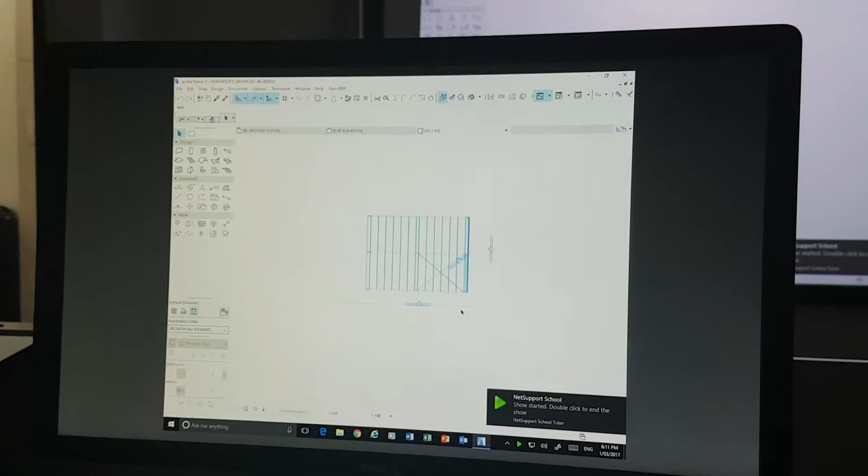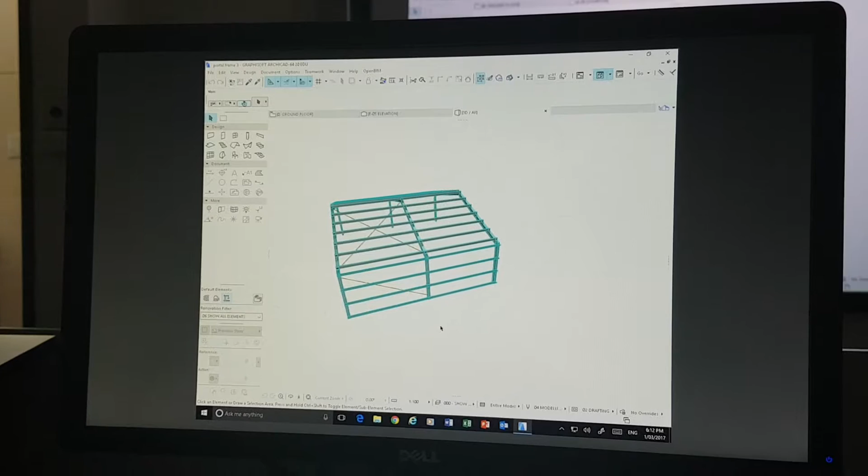What we want to achieve, this is like cooking with those cooking shows. This is the one we've cooked before, and it's really tasty, but on television you can't taste it, and you can't tell it's cold. Anyone who's been on one of those cooking shows will realise those judges have to eat cold food made 12 hours before, probably gone off. Under all those lights, I wouldn't do it. Anyway, that's just me being silly.

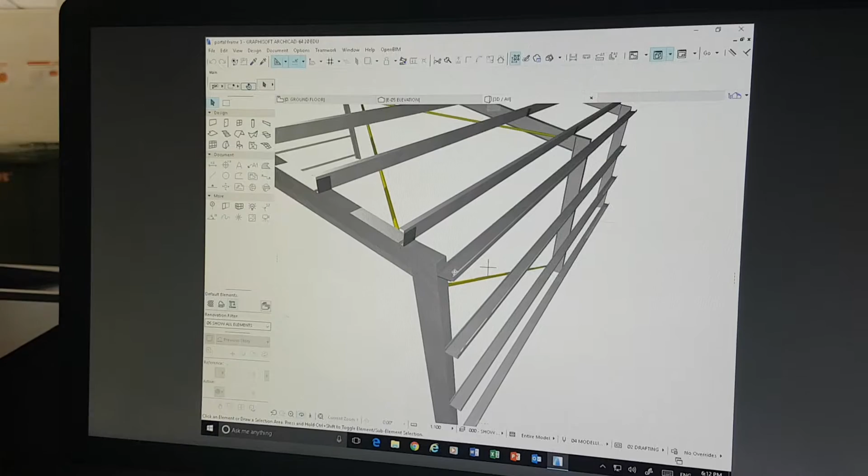What we want to achieve is the ability to put this diagonal bracing into the model. So far we've made the portal frame, using a standard portal frame out of the library. We've modified it by putting on the cleats, drilled holes in the cleats, used standard C purlins on top of that, and worked out how to rotate those. So we're learning quite well, learning a whole lot of different skills in Archicad.

The diagonals are probably the hardest thing to master, and luckily, after about 5 years, I finally worked it out. So last night I had my big moment. I worked it out. I know I'm wasting your video, I'm sorry, don't look at me like that.

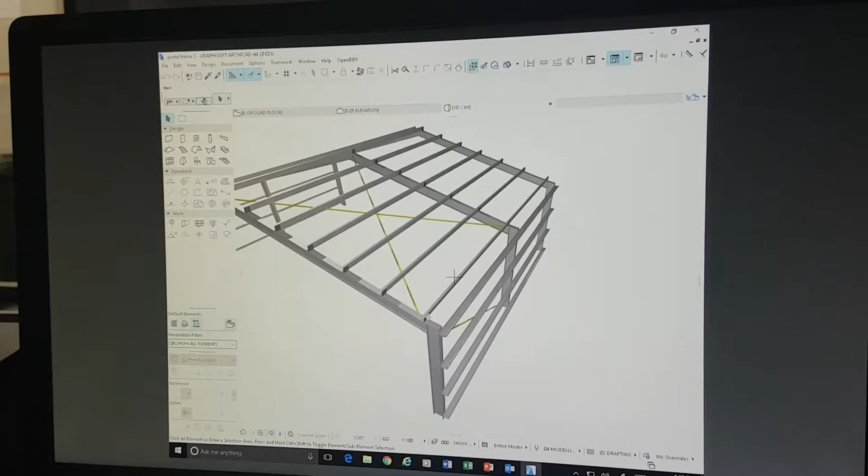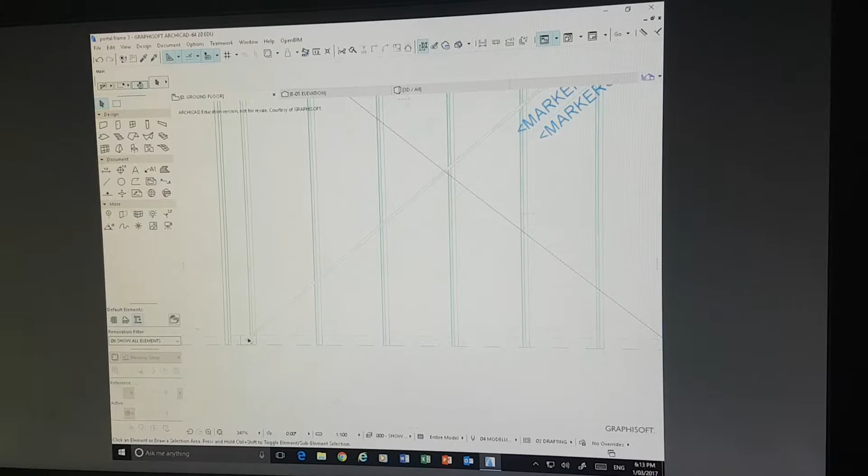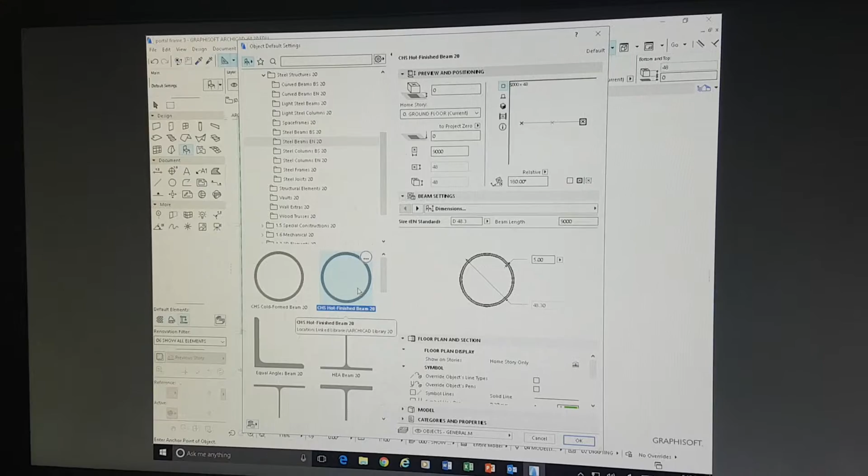So the way we start is, we've got our model built up. We go to the object tool, and I go to steel beams, and I've picked this round steel beam. The size is about 40 millimetres, and for the length I'm going to put in 9 metres to start with. It's wrong, but I'll put 9 metres because I need it more than 2 metres long. The other thing I can do is in placement, I can change the angle, which is going to be very useful for us.

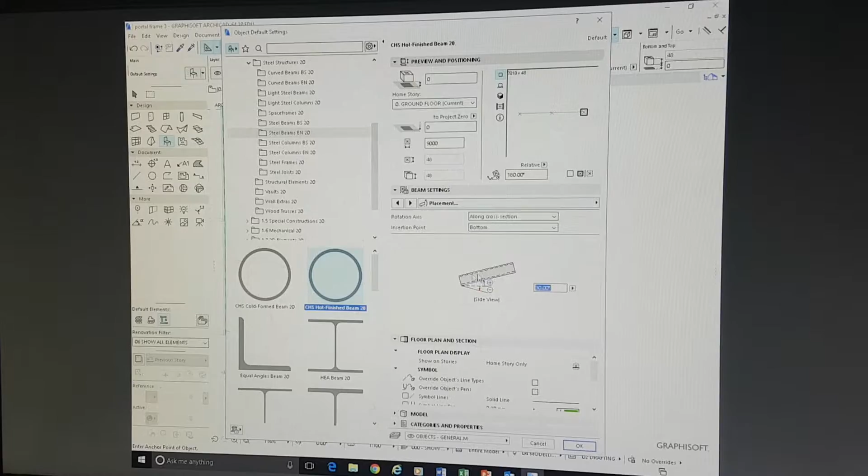I'm going to guess the angle is about 30 degrees. The last thing I do is up here, I rotate it around, and I put the insertion point down the bottom. So I'll place my diagonal tube there, and then I'll go into the elevation and see what I've got.

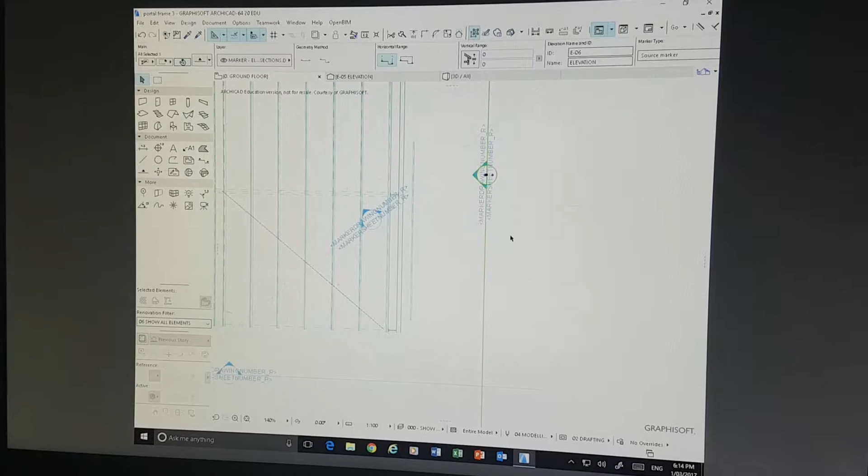So let's open this elevation, and there's the piece that I put in. You can see it's way too big, but it's pretty close to the angle that we want to achieve, which is a good start.

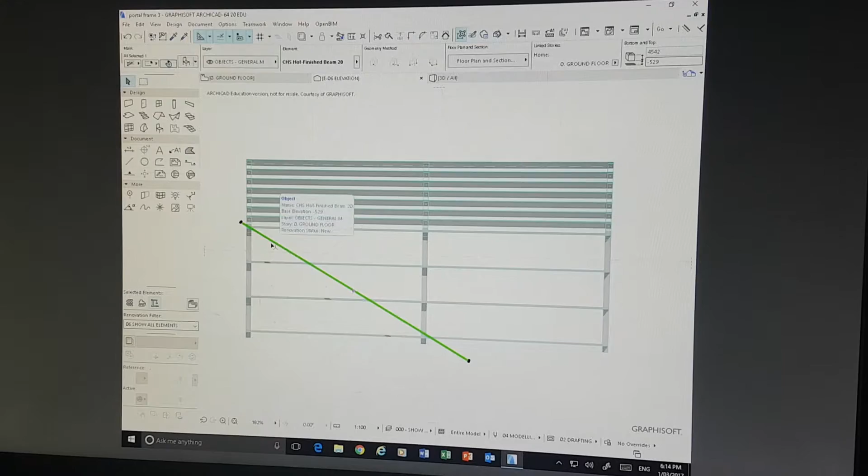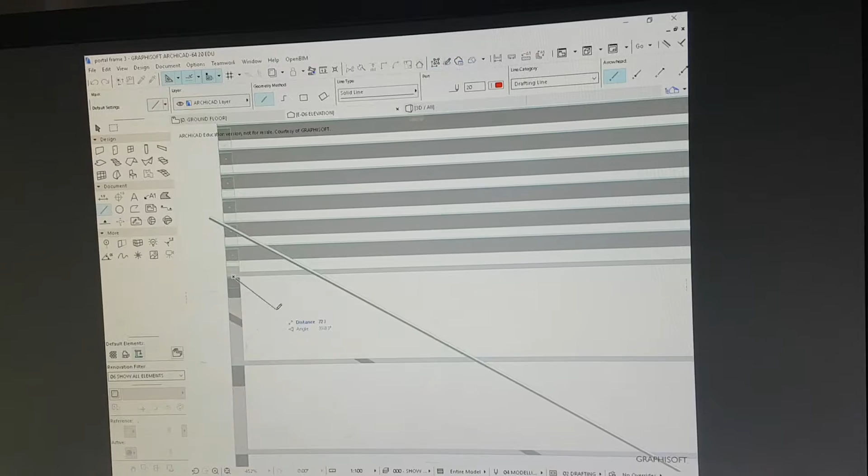The next thing I'm going to do is draw a line exactly where I want to place this beam. You don't have to do this, but I find it's good because you've got something to work to. So I'll draw a red line, working from about here down to about there. That's where I want this beam to end up, and now I'm going to measure the angle using this tool, from there to there, it tells me... come on, be good.

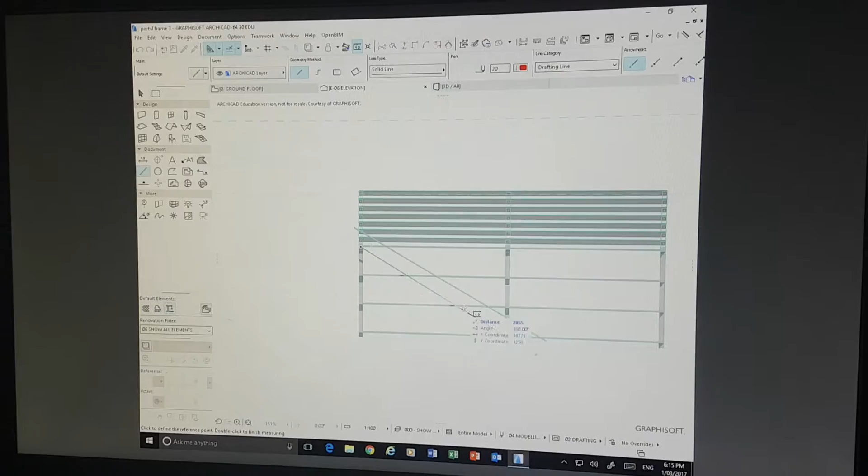It's 149.02. So what we've got to do is take 180 degrees minus 149.02, so it's roughly 31 degrees - plus or minus 0.02, so 30.98 degrees.

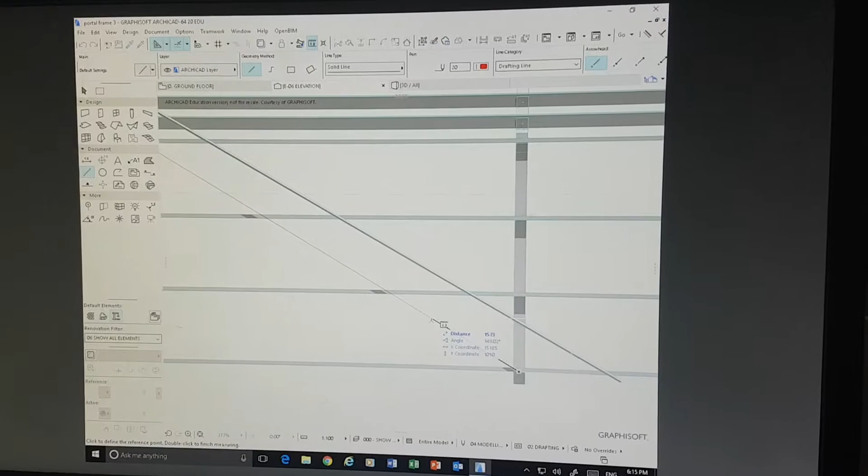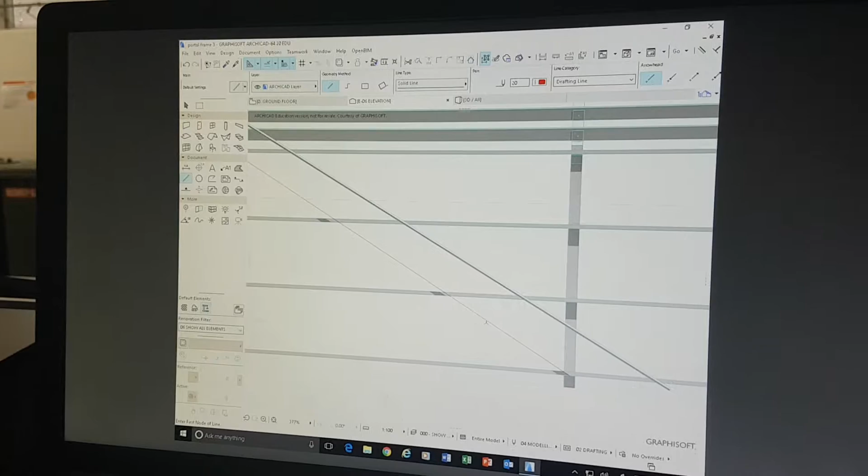But the other day we worked it at 28, wasn't it? 180 is 2 quadrants. Yeah, I understand, but you worked it at 28, not 31. It showed 149 at that angle. So it actually starts out there, 90 is there, and 149. Yeah, but what I'm saying is on Monday we worked it at 28.85. Yeah, that's because I've probably changed the position of these 2 points. Alright, okay. It doesn't really matter, it can be within that range.

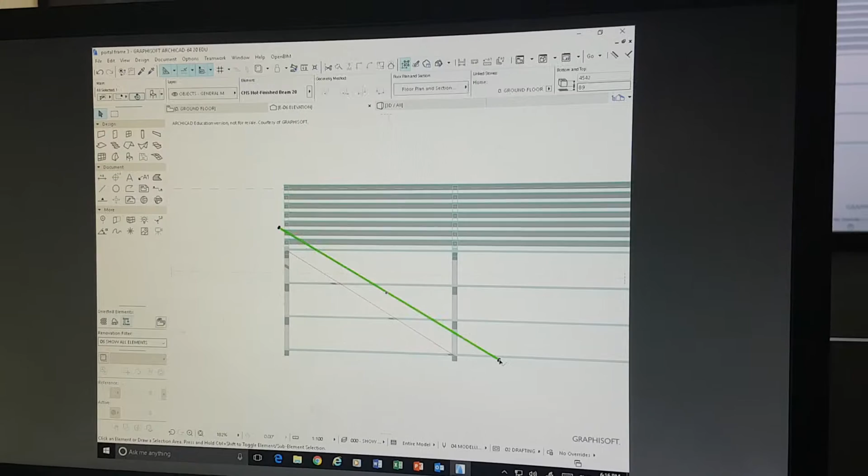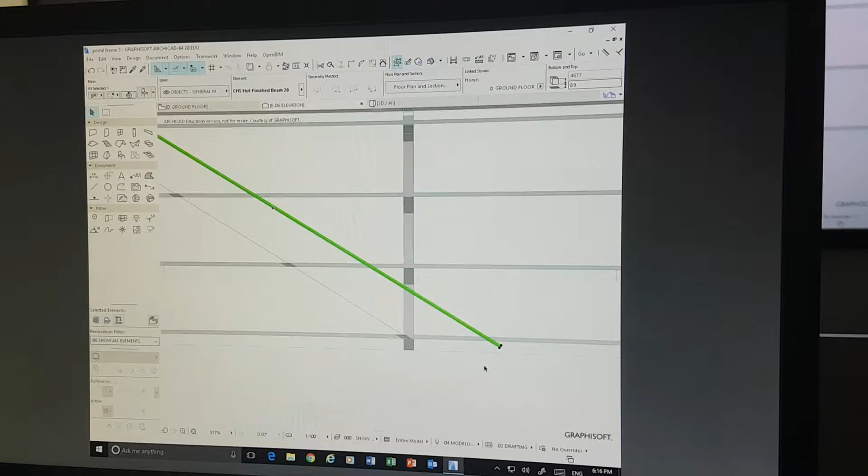So I'm going to make this 31 degrees, change that to 31. Let's crank that up. And then I'm just going to drag that beam across, using the drag function. Notice it follows the line perfectly.

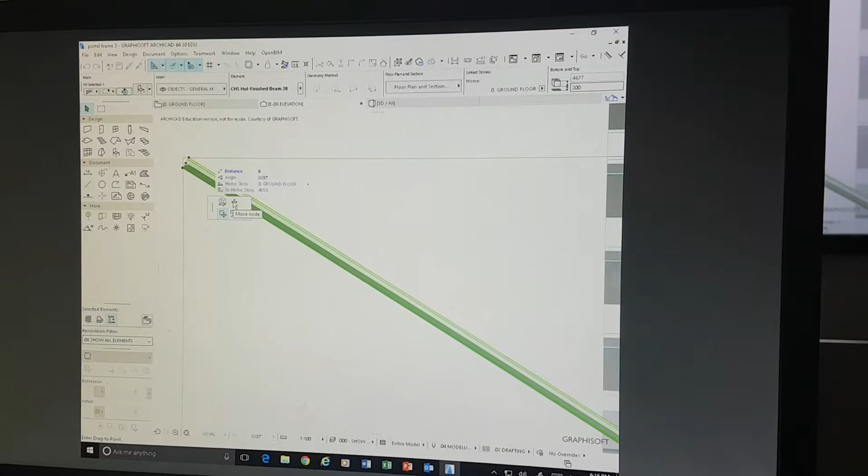The next thing I do is go to that pink dot in the middle, because that allows me this new button here, which is Move Node. So this is the way I change the length of it. I changed the length back to there. We're almost finished - this wasn't very hard at all.

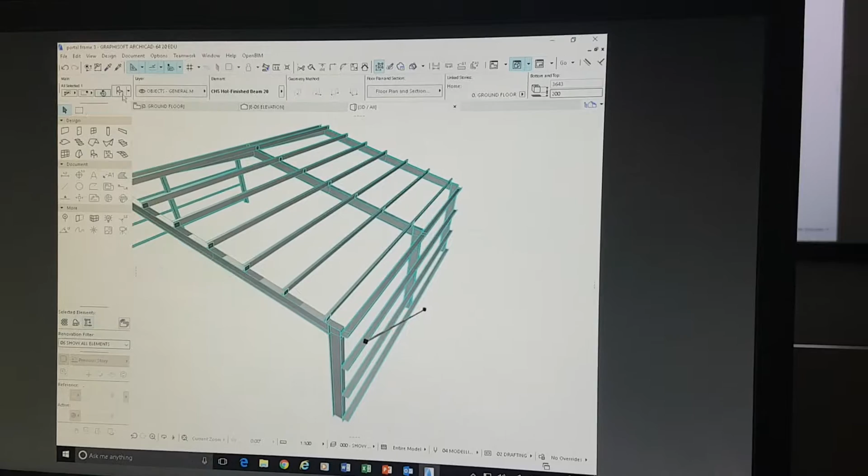What we've achieved is we've got a beam at the right angle. We go back to the plan view and we'll see it's outside of the building. We go to 3D view, you see where it's sitting, and that's all on purpose because we didn't want it colliding with anything else. The other thing I'm going to do is change the colour of it, because I like these to be yellow, not gold, yellow. Where's yellow? Pink, yellow. Right, so now it's in yellow.

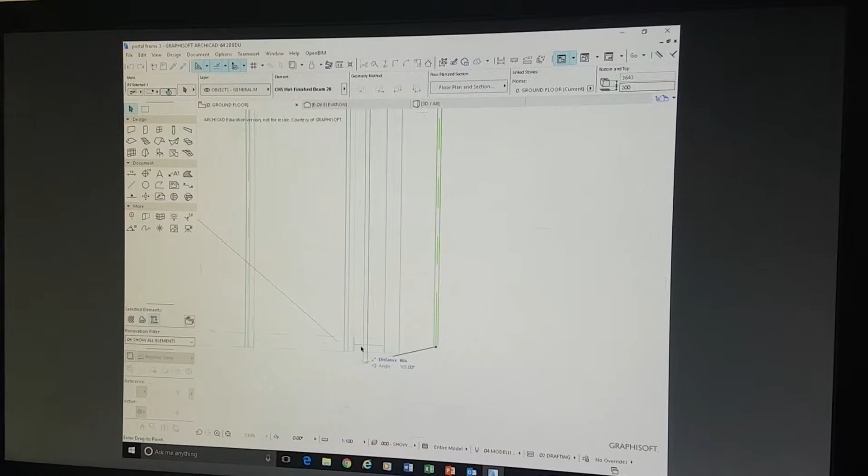Last thing we do is select it, drag it into our structure somewhere around, hold down the shift key, somewhere in the middle there, and then we test it in 3D, rotate around, and you can see at the bottom there it's come in at a nice place, and also it should be at the top.

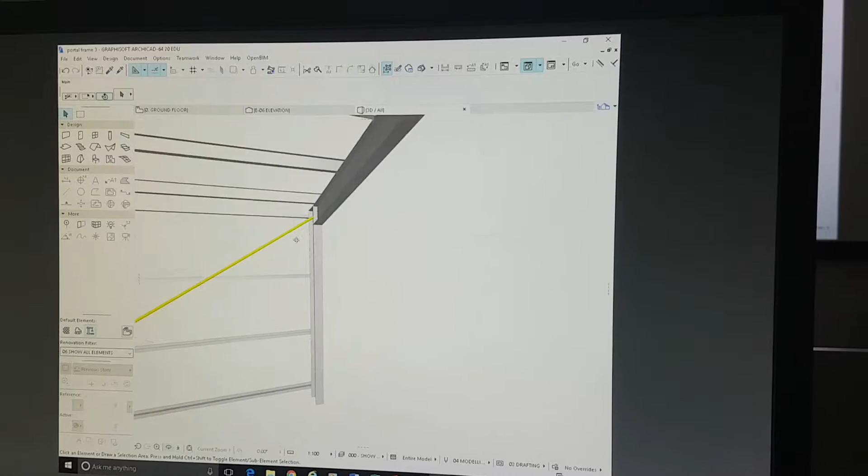There it is too. Okay, so there's a success with that. That worked. To do the top one, it's going to be a different story.

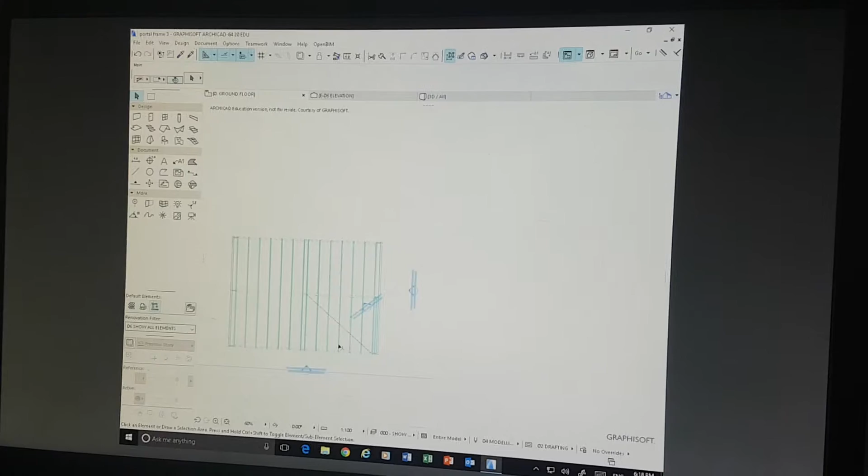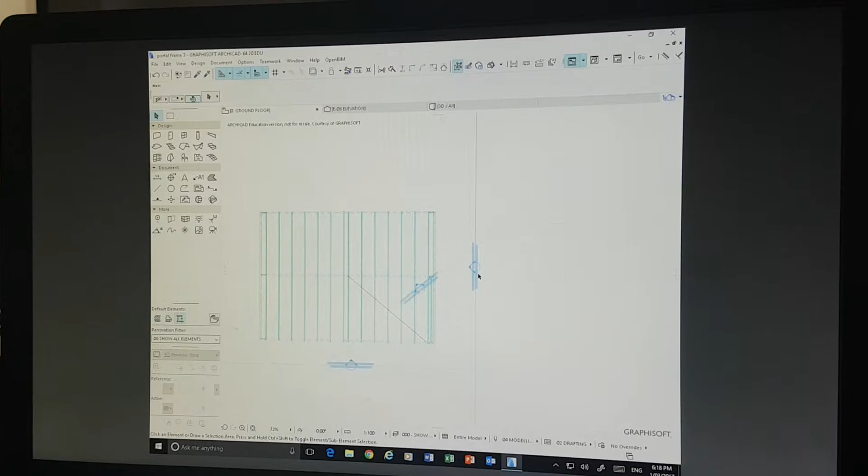One of the things we've been working with so far in placing this has been an elevational section exactly parallel to it, so that when we move it up or down, we change the angle, and it works exactly for us that way. Using that logic, I've got another elevation here, exactly at the angle I want the top bracing to be.

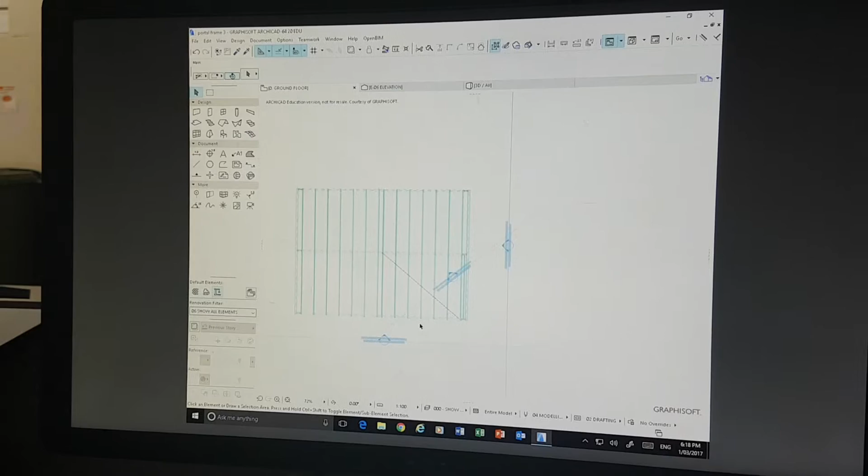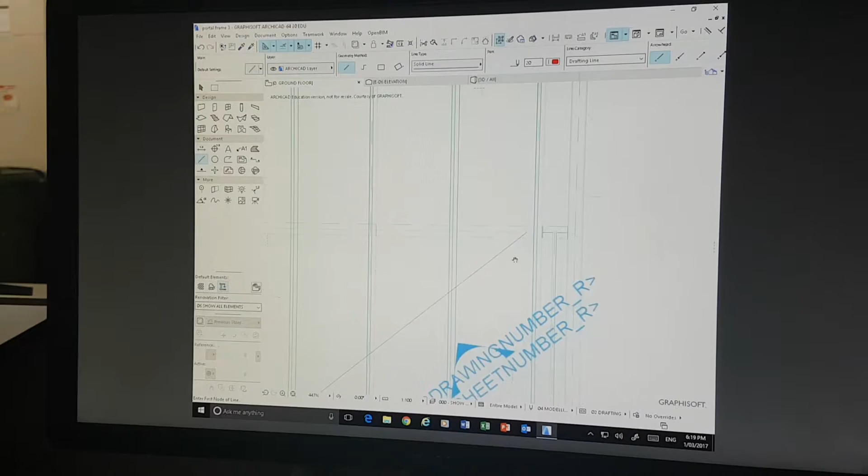So where I want the top one, I'll get rid of that. Again, I go to my line tool and think about it, and it's going to be somewhere here. That's the top part of it, and when it finishes, it'll finish somewhere in there, say. So get rid of this section, start again.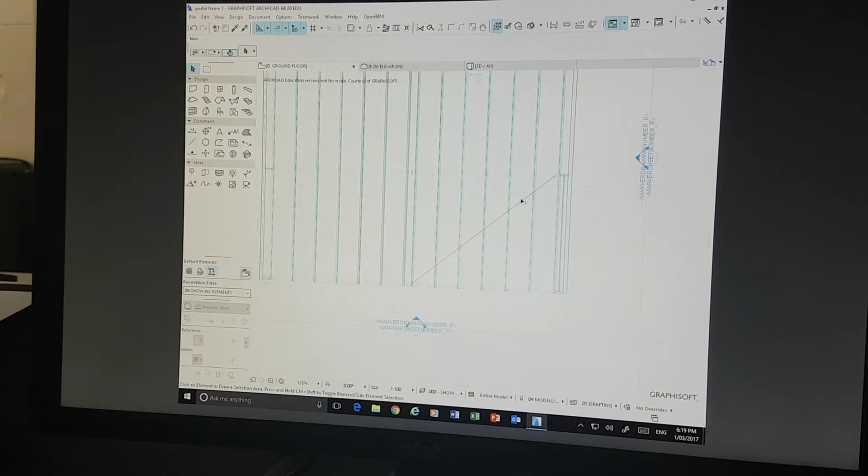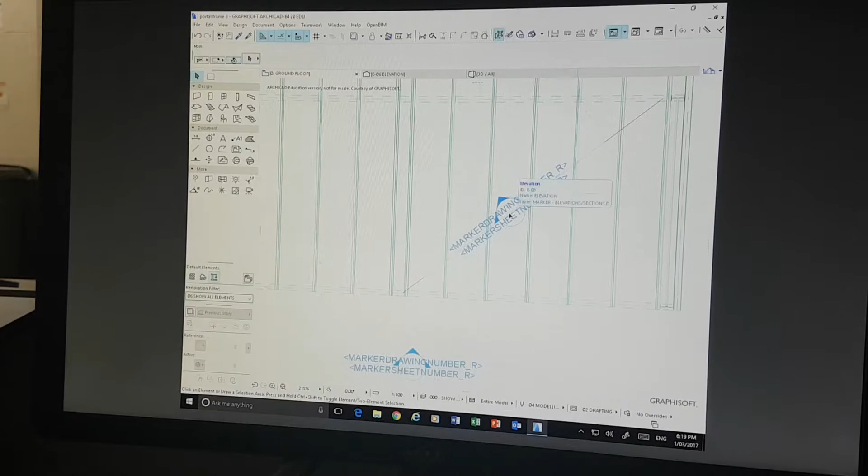So that's where I want it to be sitting if I'm looking at it in plan view, but we know it's actually on an angle as well. So the next thing I do is go back and draw another section. This time I'm just going to draw straight over the top of that line and look that way, and then select my elevation, and notice I go right to the middle of it because I know that's where I'll click and it'll pick it straight away. Those black dots are the only places you could select that elevation from.

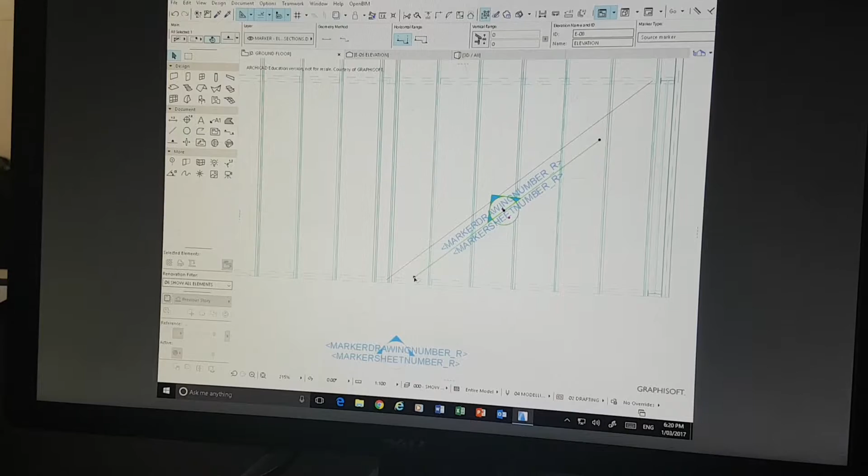So I'm going to move that back, and then stretch it out, because the extent of that elevation is defined by these black dots, so it has to be past that point.

And then I'm going to open up the current settings, and we're going to see this bit of a mess here, and we're going, what are we looking at? Actually, it's not long enough. Or is it? Oh no, we're going to there.

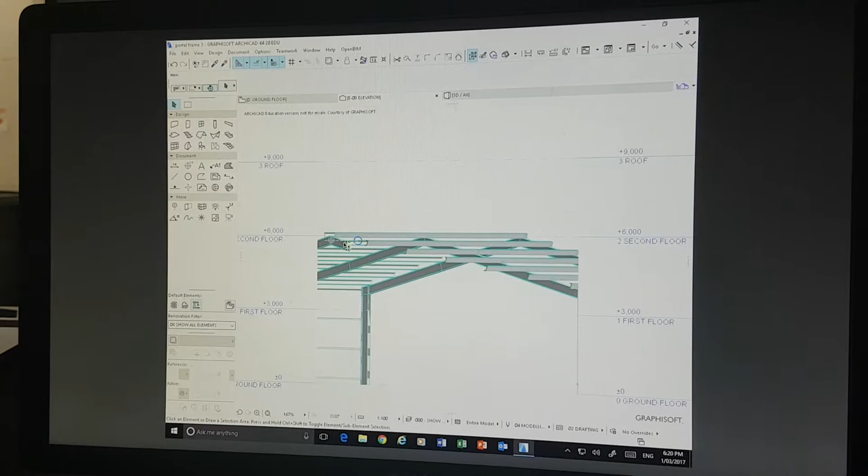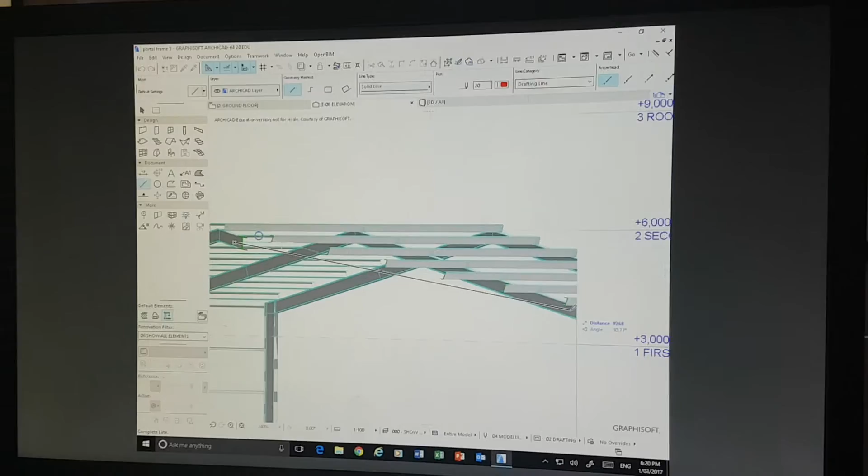So what I want to achieve is my cross brace at the top not going through these purlins, but actually just connecting that portal frame with that portal frame there. So I'm going to get the line tool and say it starts about here, goes to there. Before I finish clicking, you can see it gives me a distance and an angle of 10.77 degrees, which I'm going to write down now so I don't forget.

So I'll just click there. That's where I want my diagonal bracing to be in the roof plane. So I've marked it in plan and marked it in a parallel section — those two things help us a lot to get this in the right spot without too much drama.

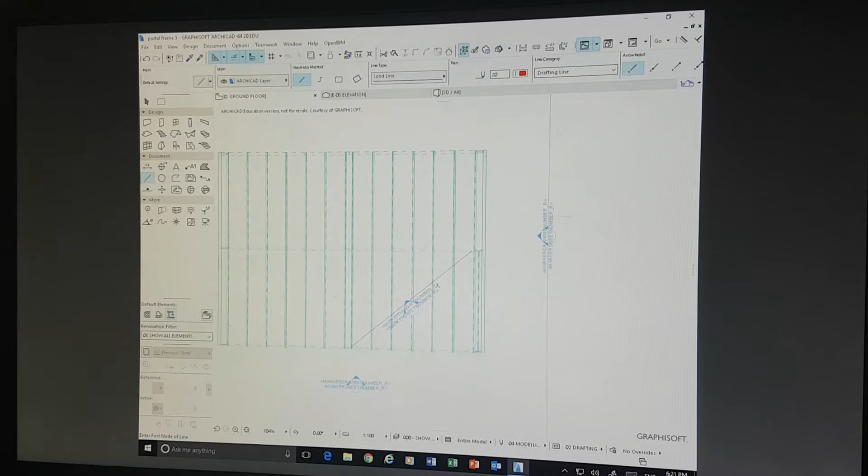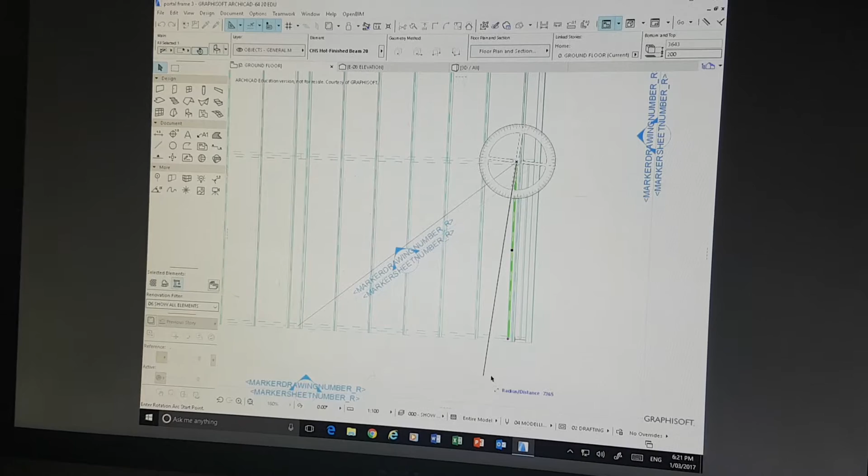Then I've already got one here, so I'm going to take this one, drag a copy, and using that pink dot, line it up with that line there, and then it's a rotate command. And we'll take that across to there.

And straight away you see it's too short. That's not a problem — all we have to do is hit that pink dot, and this comes up, which says move node. That's basically stretch. Stretch it right up to there.

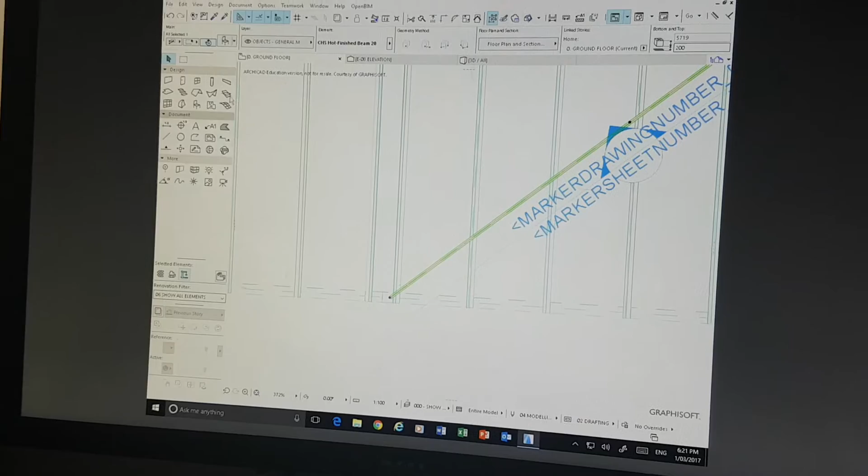And before we even go into that section, let's change the angle of that, and we're going to make the angle now 10.77 degrees. Press enter, and it makes it longer again. So then we change the length back.

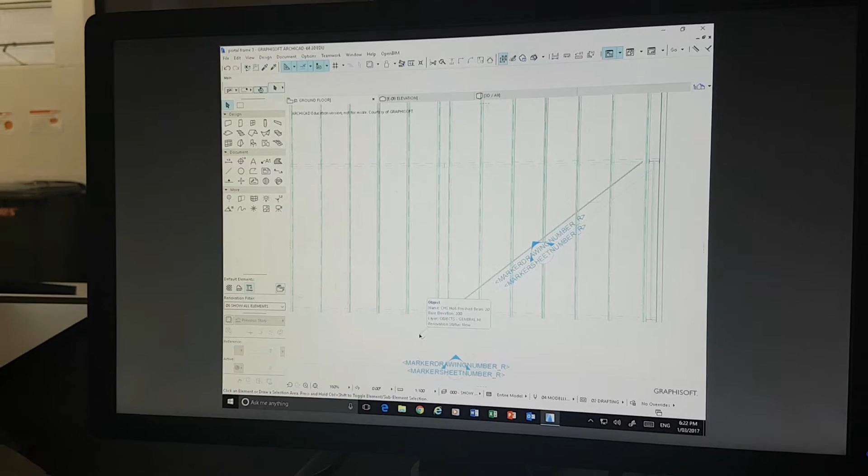Let's stretch it back to somewhere there, and hopefully we've done the job. So let's check this section. Oh, the only other thing we've got to do now is just make sure it's the right height. And it won't be. Yeah, okay.

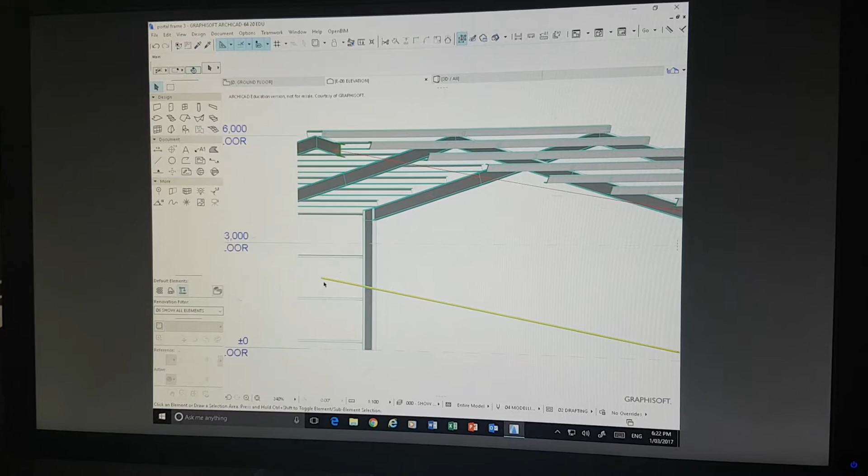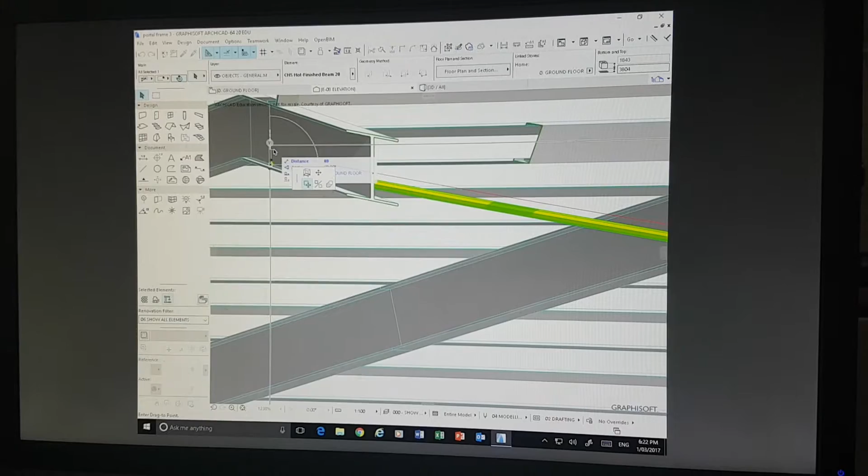So that's our beam, and let's just drag it, holding the shift key down. Drag it up there, maybe a little bit higher. Okay, that looks okay to me.

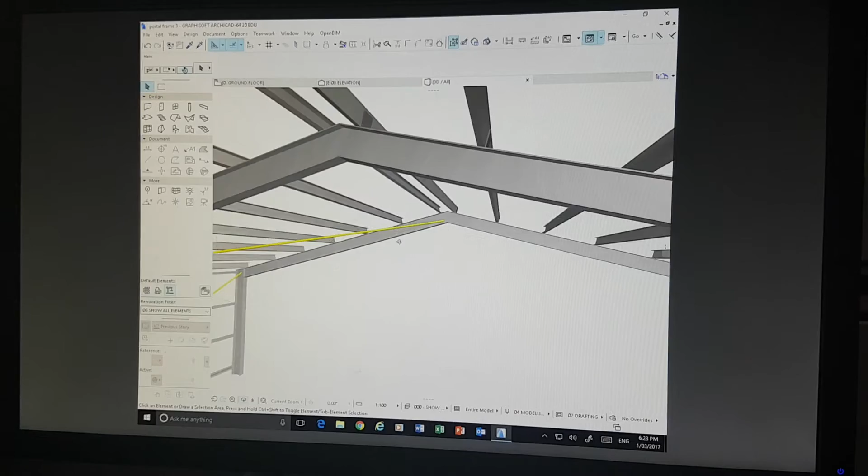So it collides through there, collides through there — that should be good. Go back here. It hasn't changed at all on the floor plan view. Our elevation looks good. Let's look at it in 3D. Hit F5, and there it's lining up there, which is reasonable.

Oops, I've got a bloody nose. And it lines up there, which is reasonable. Okay, so that's reasonable — that one's been placed in a reasonable manner.

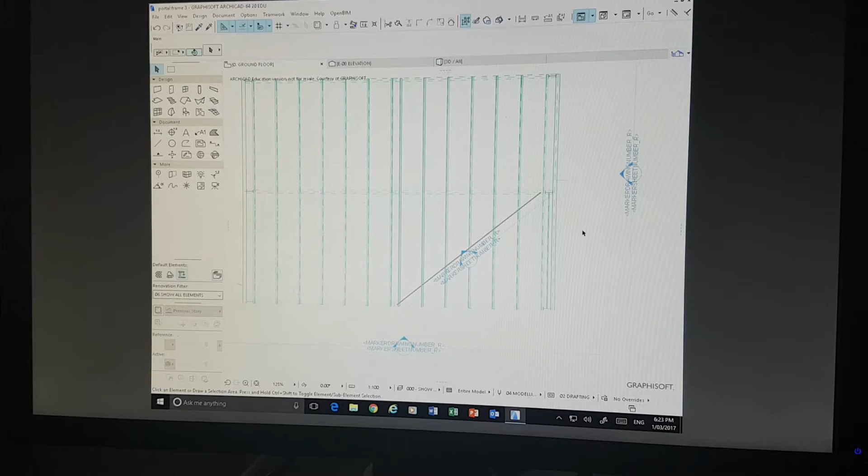The last thing we need to do is put its other member there, because we're going to bisect that one. So we'll select that column again — so it's a beam, that's the line.

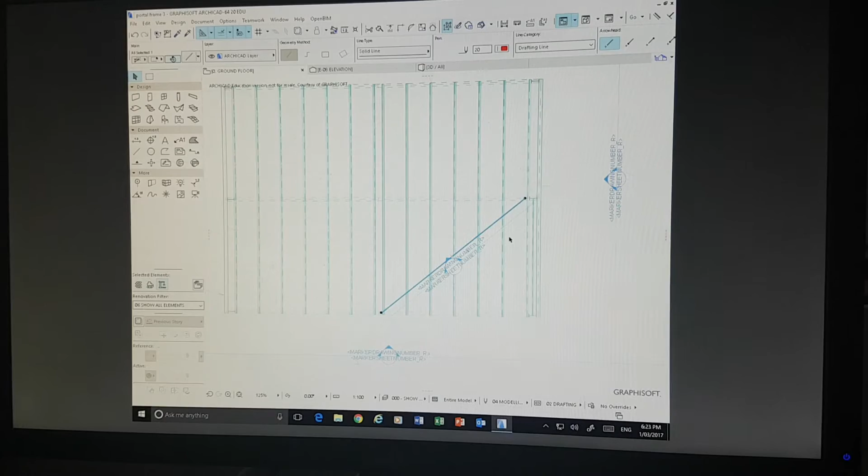Look at that. Select this, and I'm going to go move, mirror copy, and go to the midpoint, which is this black dot, and just put a line straight up. That's given me a mirrored copy of that, but the problem is the height will be wrong — or, no, sorry, the angle will be wrong.

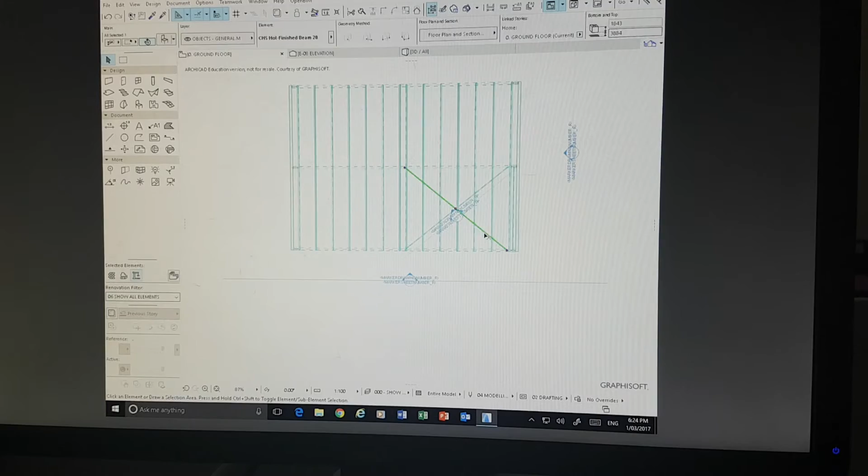So we select this one and come back here, and instead of 10.77, can anyone tell me what we might put there? Minus — minus, of course. So we'll do that, and now let's hit it in 3D, and for some reason the height is still going to be wrong.

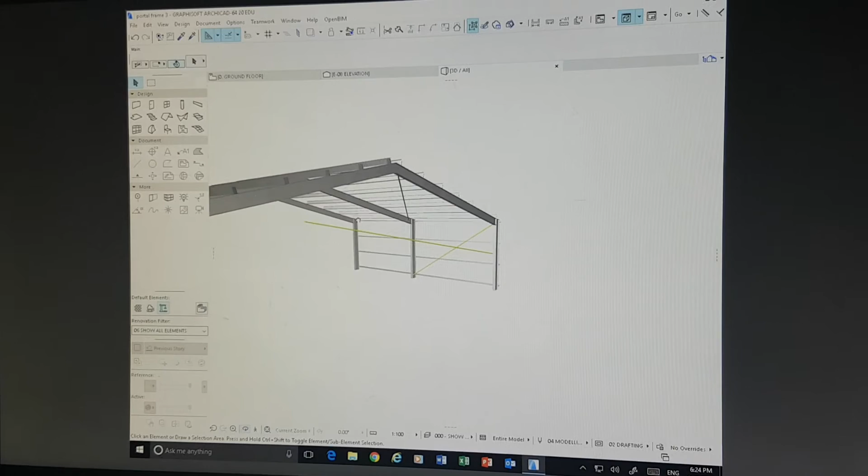Yeah, because, I don't know, it's the wrong height. How do we fix that? Well, if we select this one, which we know is the correct height, it gives us a height here of 3884.

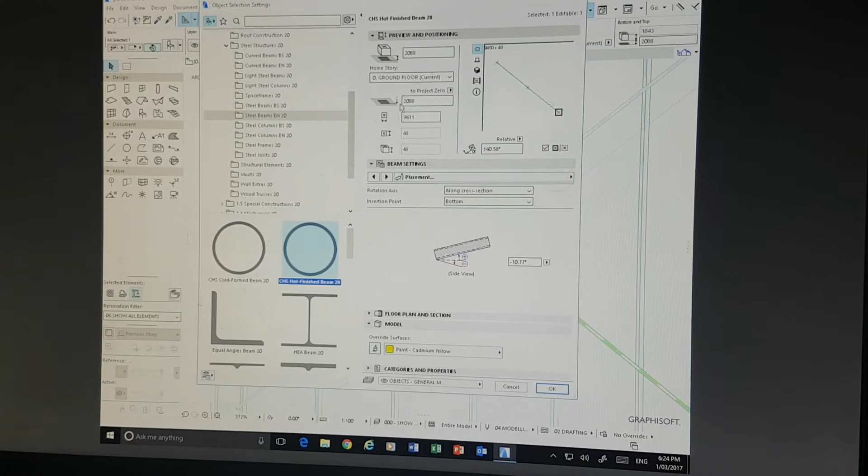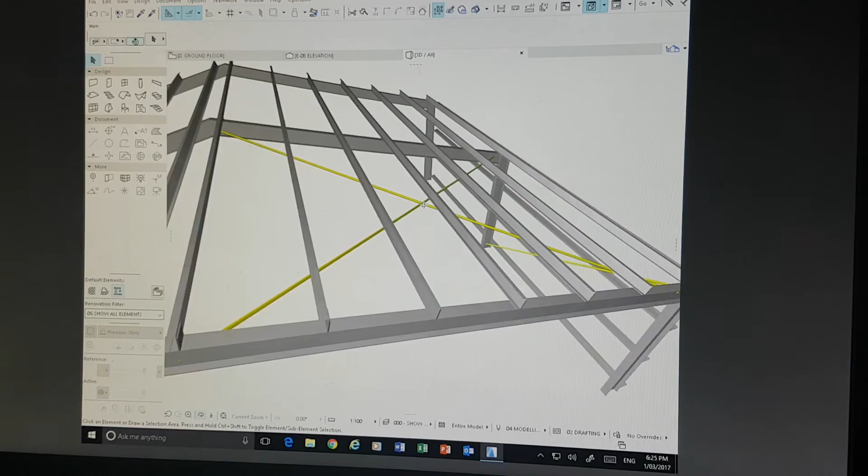So if we go to that one, it should be the same height — it's not. So let's go 3884, and now those two should be exactly the same, and I'll prove it to you. Look at that junction — perfect. Okay, so there's your top bracing, there's your side bracing.

I think I've made it look simpler than it really is, but it's all to do with technique. You really have to be on top of your 3D and understand what you're doing in all of these commands to make that work so easily. I remember in years gone by, we've had hours trying to do this.